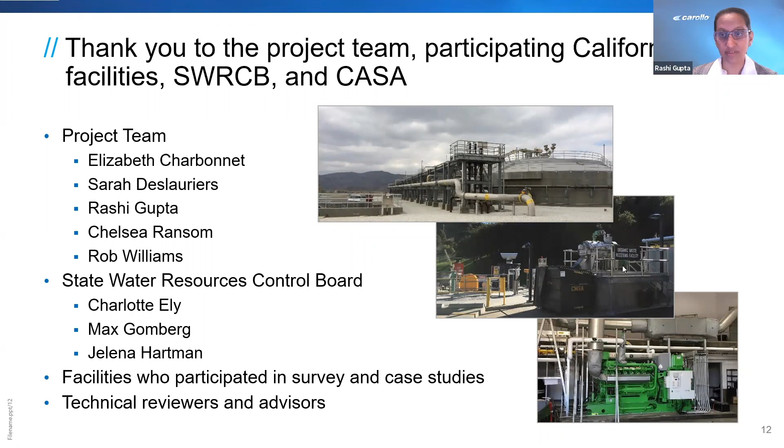Senate Bill 1383 was really the driver for this work. It focuses on several things, including an organic waste diversion component. The bill was adopted in 2016, with a goal of 50% organics diversion from landfills by January 1st of 2020. The regulations have been finalized, or are in the process of being finalized, and are expected to be adopted either the third or fourth quarter of this year.

Then in 2022 is when state enforcement on jurisdictions begins, followed two years later by jurisdictions beginning their own enforcement. In 2025, the target is to have a 75% organics diversion from landfills, with the ultimate goal being the bold item there in 2030 of a 40% reduction of methane.

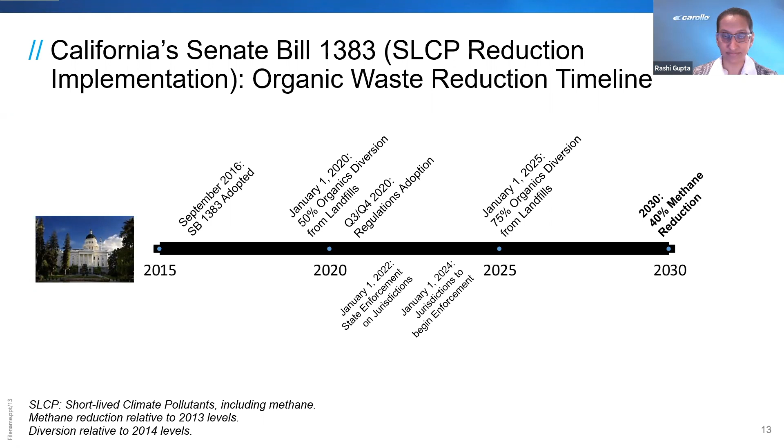California seeks to reduce methane emissions, and co-digestion at treatment plants could play a major role. Methane is a very powerful greenhouse gas, and a lot of methane is released from food waste in landfills. So reducing that food waste will reduce methane, and diverting the food waste to anaerobic digestion produces renewable energy and soil nutrients.

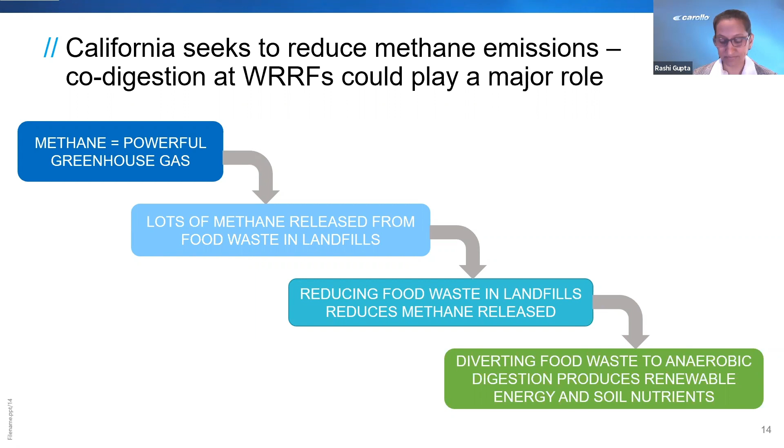So what is co-digestion? Very big picture again: co-digestion includes a municipal sludge component that is typically fed into our anaerobic digesters, and an external organic waste component, which can be food, food processing waste, FOG, or organics from municipal solid waste. The bold item is really what today's talk is about.

We're focusing on the organics from municipal solid waste component, shown here in bold. That organic feedstock needs to be cleaned in some fashion, whatever it happens to be, so some level of pre-processing. Then the sludge and this organic waste are fed into the anaerobic digester.

From the digestion process, a biogas component is generated that we can treat and use beneficially for vehicle fuel, pipeline gas as biomethane, or through cogeneration with heat and power. The solids are then further processed through dewatering and used beneficially off-site. There's also a component on the side stream that requires treatment within the treatment plant, but we're not going to be focusing on that today.

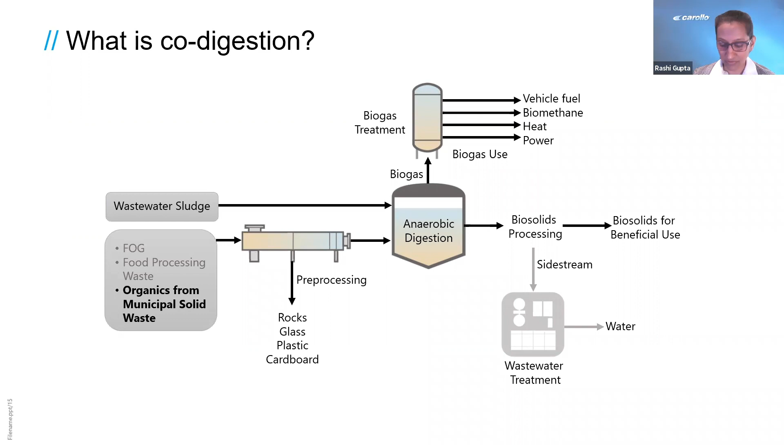There's been a lot of talk in the last few years about excess digester capacity for co-digestion and producing renewable energy at treatment plants. The state asked whether we can use this excess capacity to help meet its methane reduction goals.

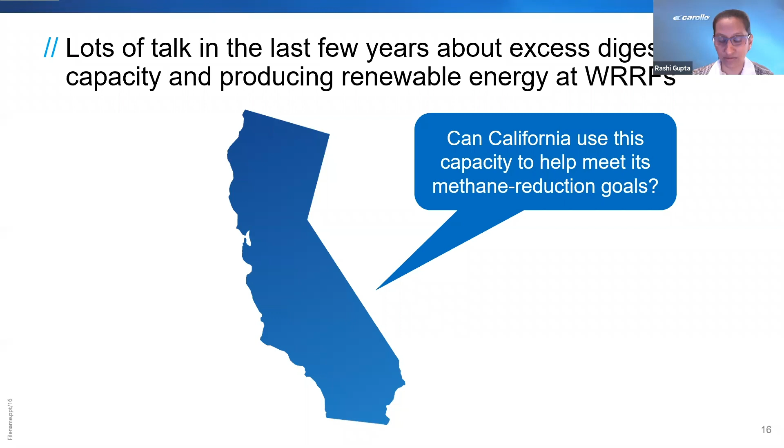The state agencies had many of the same questions about co-digestion as you probably do: How much capacity do we actually have? How much additional capacity do we need? How much is it going to cost to implement? And how much of an impact is this actually going to make towards our goals?

Based on those questions, the State Water Board worked with us to develop this report, which was the final product, finalized in August of 2020. The report is titled Co-Digestion Capacity in California. It's a 6-chapter report with a lot of detailed appendices.

For any of you on the line interested in those details, I would highly recommend taking a look at the appendices. They include a lot of the information that formed the basis of the report, with all the assumptions and details. The report was actually finalized in June of 2019, then underwent a multi-agency review at the state level, which ended at the governor's office, and was finally published in August of 2020.

We're going to go through the report chapter by chapter, but first we wanted to put out a polling question and allow you guys to fill that out.

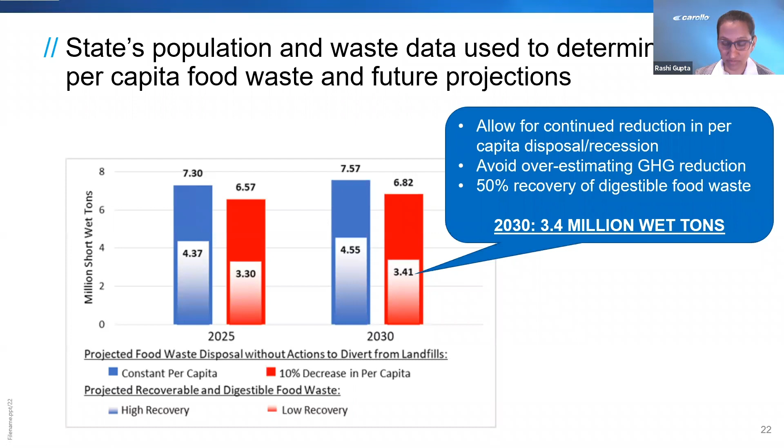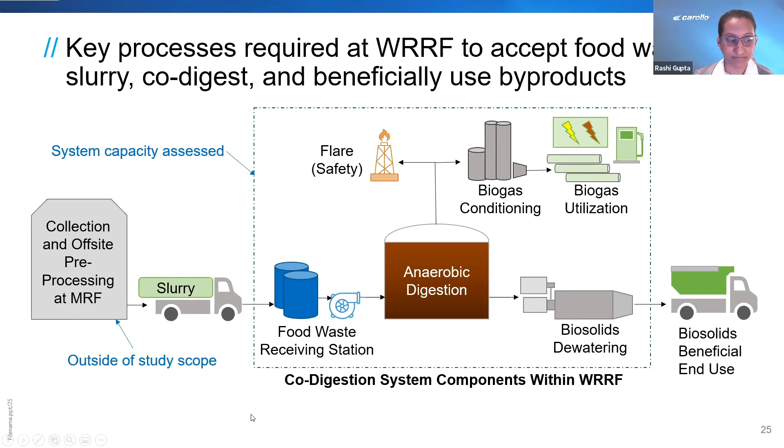So we developed a comprehensive survey that was distributed to the treatment plants within the state, focusing on solids and biogas systems, and we analyzed the results to develop our capacity analysis. The survey was sent to 223 treatment plants around the state, and we got responses from 99 of those, representing about 80% of the state's total design flow capacity. We thought it was a pretty good representation of the capacity within the state, and we also got a good variety of the size of the plants that responded.

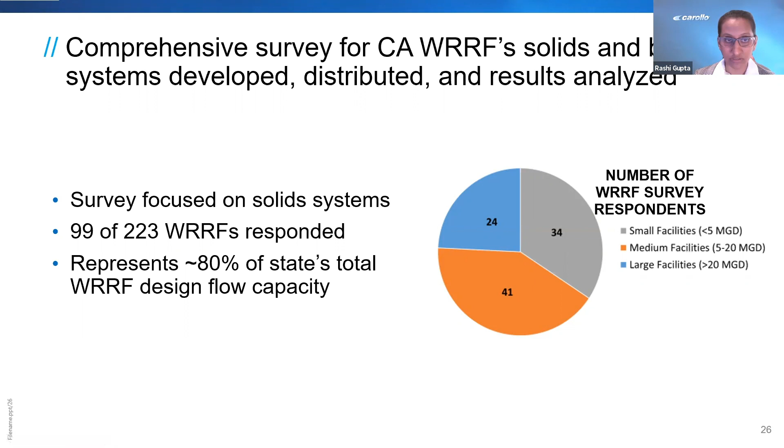So we took that information from the survey and compared current and projected loads, including any organic waste that the plant is currently receiving, and then the loads projected out in 2030 for both the municipal wastewater indigenous sludge, as well as the potential organics in the future. And we compared that to the existing capacity of the systems to identify excess capacity in those key processes that I mentioned.

One thing to note here, throughout this presentation as well as within the report, is that excess capacity is reported as short wet tons per year of diverted food waste, because we wanted to illustrate the statewide impacts of organics diversion. That is the diversion from the landfill, so that is what the terminology is. What that means is the food waste is diverted to a material recovery facility at about 30% total solids.

But a treatment plant needs a material that is pumpable to be able to be sent into the digestion process, so we are assuming that the slurry produced and delivered to the treatment plant is at about 15% total solids. Just keep that in mind, that any of the values you're seeing on the charts are in this form - the short wet tons per year of diverted food waste at that 30% total solids value.

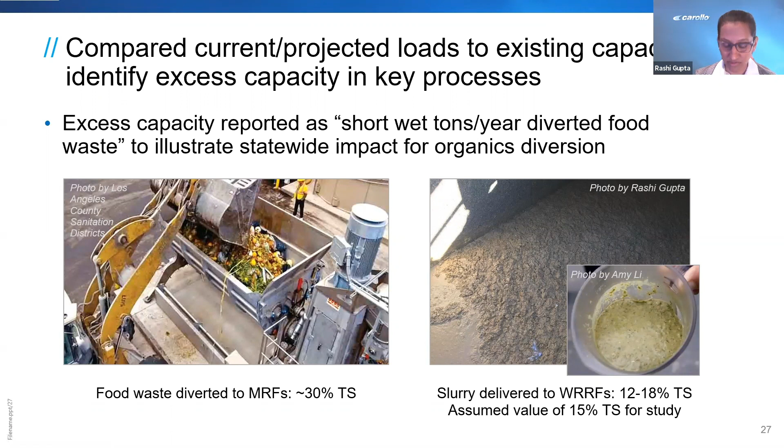So we looked at all of the key processes, and specific to digestion, we looked at various operating scenarios. We looked at SRT - a 15-day SRT as a minimum, and then we considered a design SRT for treatment plants, which is usually higher than that 15-day minimum. We looked at redundancy, whether we had all of our digesters in service or if we had one of the largest digesters out of service.

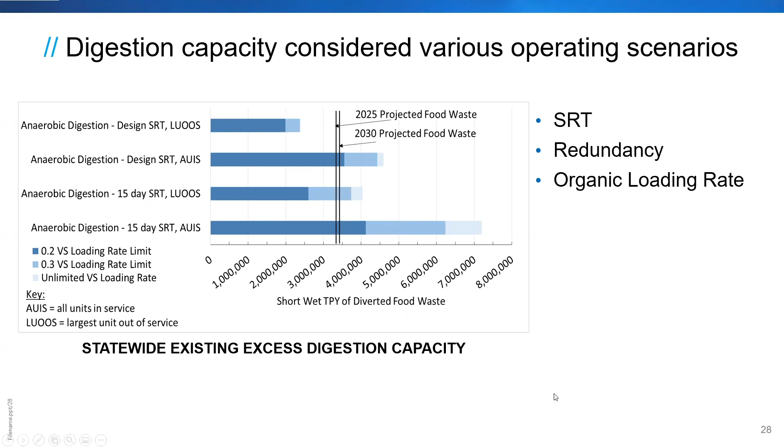And we considered different organic loading rates. The organic loading rates that we considered are higher than what we typically look at for just indigenous sludge monodigestion, which can be difficult to digest. The food waste is more easily digestible, and several plants have been able to accommodate higher volatile solids loading rates. So we looked at the 0.2 VSLR - that's 0.2 volatile solids per cubic foot per day as the loading rate. We looked at that, and we know that's achievable and maintainable at treatment plants.

Some have indicated you can achieve even higher loading rates than that, so we did consider the 0.3, and then we said, okay, if there's no volatile solids loading rate limit, what kind of capacity would we have? So we looked at all of those scenarios to determine where we stood relative to the projected food waste for the capacity. And again, this is excess capacity under digestion statewide.

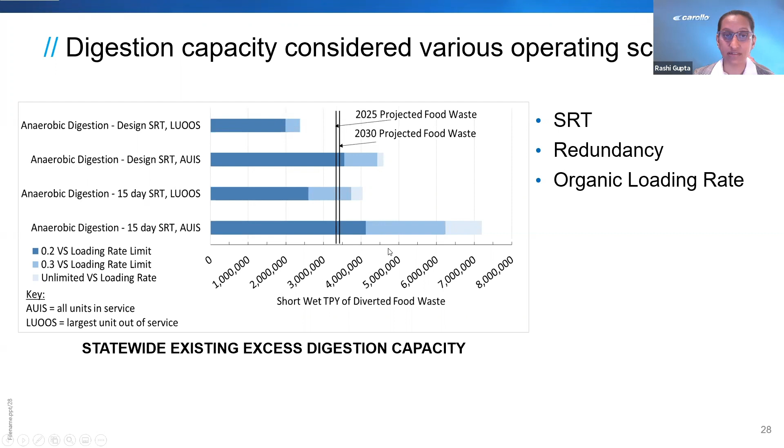The capacity for the specific processes at large facilities, we then extrapolated to cover those plants that did not respond to our survey, so the extrapolation only occurred for large facilities. There were 9 treatment plants that we know had digestion across the state that did not respond to the survey. We extrapolated only for those large facilities, and we only extrapolated the processes that would scale with the influent flow - the digestion, the dewatering, and the flare capacity. We did not extrapolate capacity on anything else.

We found that we have sufficient digestion capacity for most of the projected food waste of that 2030 condition - about 70% in our more conservative digestion operation scenario, and more than 100% capacity for the more aggressive scenario on digestion capacity. The other thing to point out here, and this is one of the major portions of the report, is that the capacity limitations are really in the receiving station, the biogas conditioning, and biogas utilization elements. Those are the key processes where we did not have sufficient capacity, and that illustrates where we might be able to target investments to maximize the capacity of the digestion, which we have sufficient capacity for.

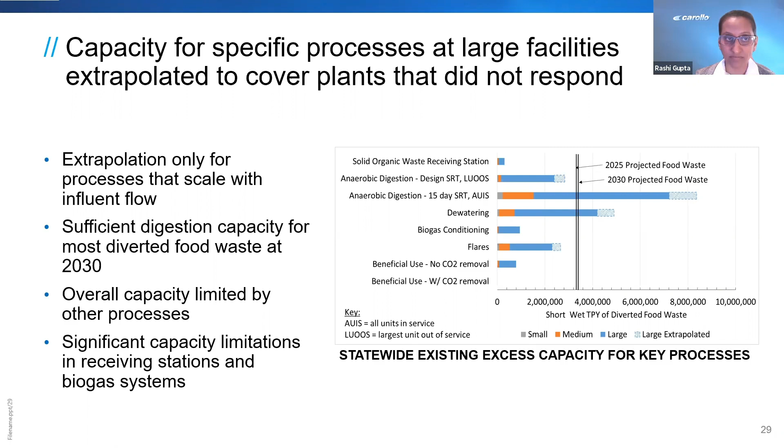We also looked at and found that we have 7 treatment plants around the state that currently have all of the system components we mentioned. We looked at the location for those facilities, and you can see that they're located in those areas of the state where we're generating the most food waste, and that they're the most populous.

So there's some synergy there about the location of the treatment plants and the source of the food waste. We also found that there are limiting processes. There's capacity limitations within these 7 treatment plants where the capacity is not limited by digestion, but by one of those other key processes. Because of that, we're limited right now, in terms of capacity in the ground, to about 118,000 wet tons diverted food waste per year, which is only about 3.4% of that 2030 projection.

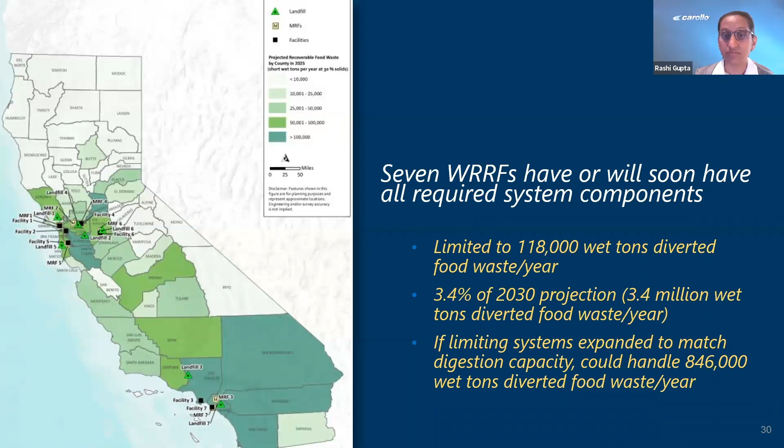However, if just those 7 treatment plants were to expand those limiting systems to match their digestion capacity, they could handle 846,000 tons per year. That's about a quarter of that 2030 projection, just in those 7 facilities. So that helped us understand that there are significant benefits to targeting investments in these ancillary processes, not the digestion, but the key processes that we need for this to work out. And that leads us to chapter 3 that Elizabeth is going to summarize for us.

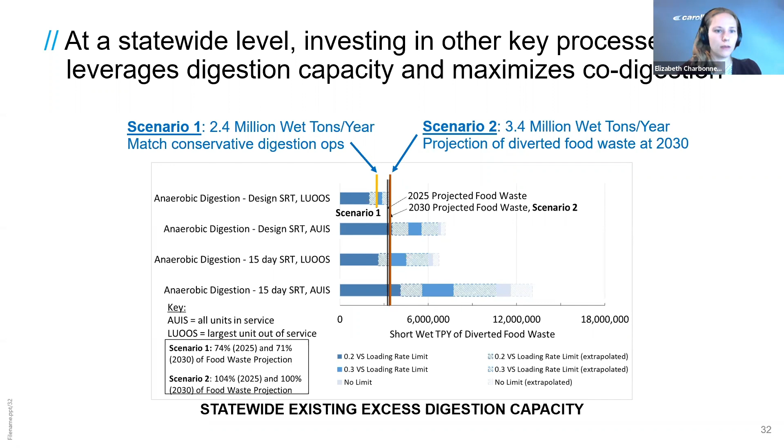For each of these scenarios, we then developed planning level capital costs as well as O&M costs for these 2 scenarios, and then also for an illustrative facility to provide agencies a guidepost to more readily understand the potential costs for their particular facility.

Starting with capital costs, we just looked at the capital costs needed to increase the capacity in the key processes other than digestion. We generally used a unit cost approach for the majority of these unit processes - for biogas conditioning and end use, as well as dewatering investments. But then there were a couple of key processes that didn't really scale with flow or load, so instead we used discrete costs for different sized facilities. For example, for the receiving stations, and then one discrete cost for the interconnection to a pipeline, which is not dependent on facility size.

From an O&M perspective, we also looked at these costs, and specifically, we just looked at the incremental increase beyond the indigenous solids treatment. So we were just looking at the cost of treating this additional food waste that would be added to each of the treatment plants in California. We looked at labor costs, maintenance, energy, as well as additional dewatering polymer and biosolids hauling and end use costs from that food waste addition.

For more details about all of these cost factors, the assumptions that went into them, take a look at Appendix 3A of the report that has a pretty good summary and also compares the costs that we were using to some other reports and other numbers, just to get a sense of where our numbers are falling.

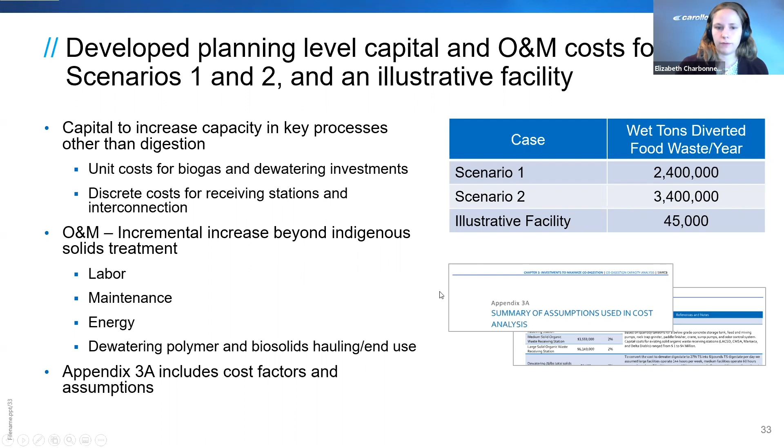We also looked at revenue estimates, not just costs for co-digestion at wastewater treatment plants. These revenue estimates included revenue from tipping fees from accepting that food waste, and also from biogas utilization. Specifically for biogas utilization, we looked at 3 different end uses for biogas: first, turning biogas into electricity through cogeneration; second, turning biogas into RNG for vehicle fuel use; and then third, turning biogas into RNG for pipeline injection. We assumed an equal split among these 3 different end uses for biogas across the state.

We not just accounted for revenue of those commodities themselves, but we also looked at the potential revenues from different energy credits - specifically D5 RIN credits, low carbon fuel standard credits, as well as SGIP renewable energy credits, with the big caveat that there's a lot of inherent uncertainties in all of these revenues, so as the values change, that can really impact the economics. For example, the low carbon fuel standard credit, shown in the graph on the right, you can see how it's varied over time. For the report, we had assumed $169 per metric ton of CO2 equivalent, which based on the past couple of years of data seems to be still a reasonable number to be using.

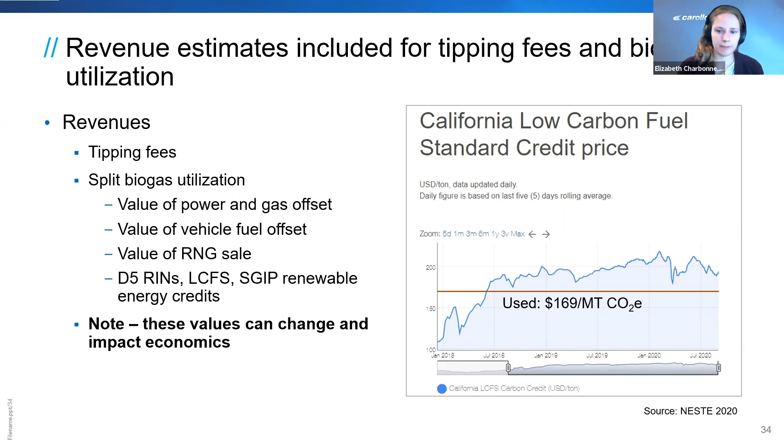This table shows the results of the cost and revenue developed for each of the scenarios considered. A couple things to point out: on the far right, the biogas use for the 3 different cases. For the 2 statewide scenarios, scenario 1 and 2, we were assuming an equal split of biogas for electricity, vehicle fueling, and pipeline injection. For the illustrative facility, we just picked one, and we assumed it would be CNG vehicle fuel use.

I also wanted to note that the estimated O&M costs per year are much less than the estimated revenue per year in all 3 of these scenarios. Additionally, over the 15-year project life, if you do a simple payback period, they cover the estimated capital costs. So these projects can be economically favorable.

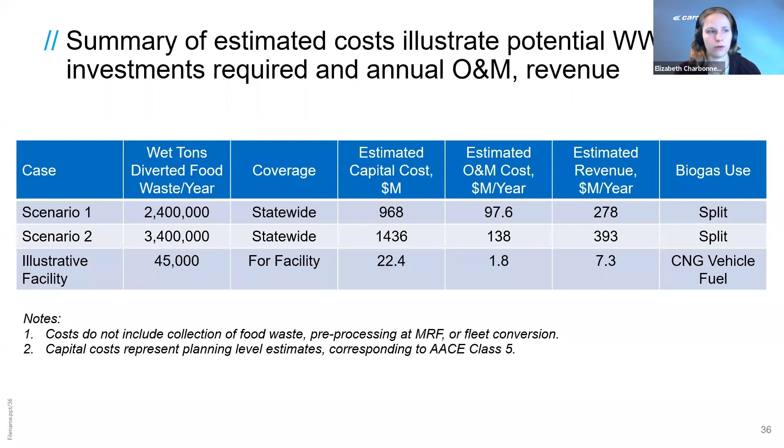Additionally, we conducted a number of sensitivity analyses for various biogas utilization options, as well as impacts on facility size and CNG and power prices. The renewable energy incentives currently favor CNG and RNG uses for biogas, but positive economic outcomes are more likely for higher capacity facilities.

However, this analysis looks at the state as a whole, but the story for each individual treatment plant may be different. For example, for a facility that may not have a vehicle fleet but has an underutilized cogen engine, electricity generation may be more favorable for that facility. So you do have to look at this on a facility by facility basis.

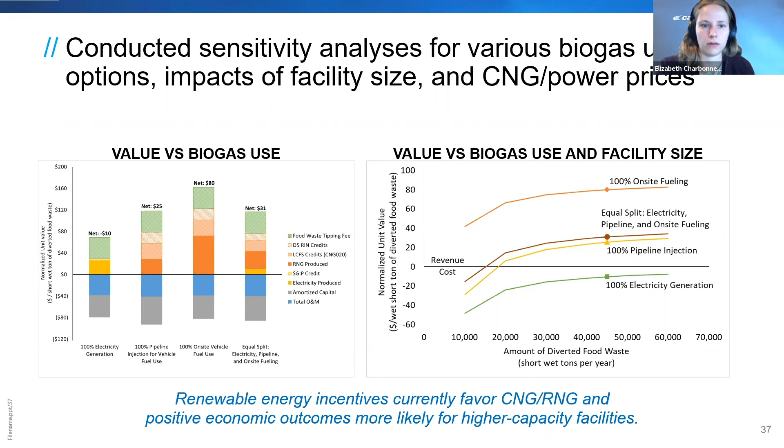We also looked at non-economic impacts for this report. First, we considered community impacts near water resource recovery facilities, starting with job creation. Based on the 7 facilities currently co-digesting food waste, we found that job creation at these wastewater treatment plants may be limited. However, there may be additional jobs possible for offsite needs at materials recovery facilities, for example.

Additionally, we looked at quantifying truck trips and noise near wastewater treatment plants and found that would increase, but analogously, truck trips and noise near landfills would decrease because food waste is no longer being sent to those facilities and instead sent to the water resource recovery facilities. Finally, we also looked at odor control, and all of the costs we were assuming did include odor control to help minimize impacts on surrounding communities.

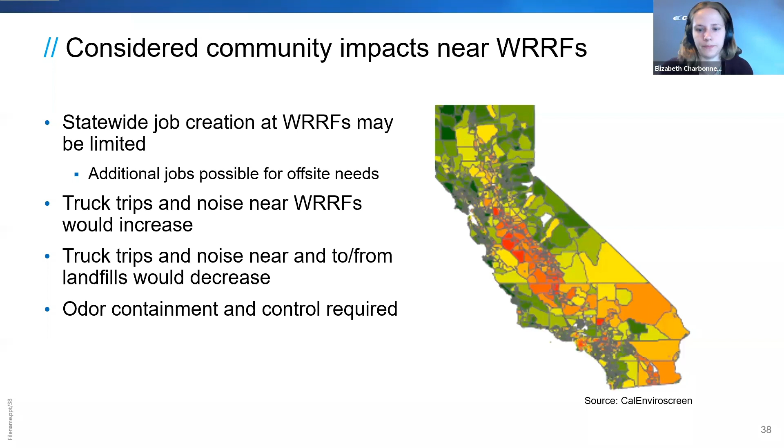In addition, we did outline regulatory considerations for water, air, and land that can affect feasibility. For water, if you are a facility that has nitrogen limits or TDS limits, the effluent could be impacted by co-digestion, and side stream treatment may be required depending on what that limit is and what your secondary treatment system looks like. From an air perspective, air boards are adding increasingly stringent limits on air quality, which may impact the economics of biogas utilization. Finally, from a land perspective, for biosolids generated, you'll need to think about how to best use those biosolids, and limits on land application can necessitate longer haul distances and increased costs for biosolids management as well. So some non-economic factors to consider.

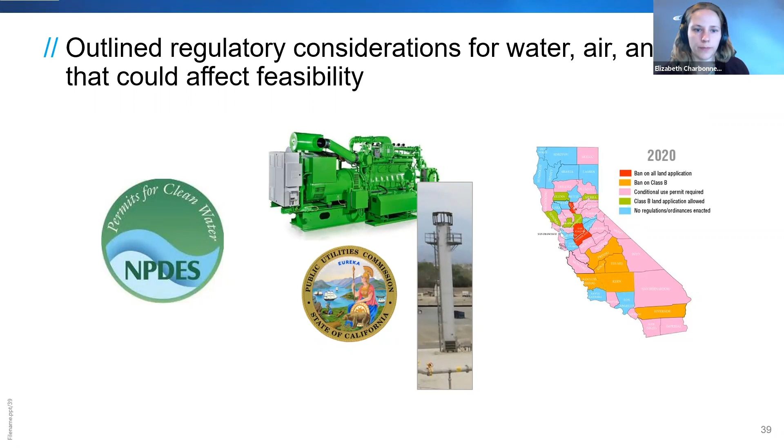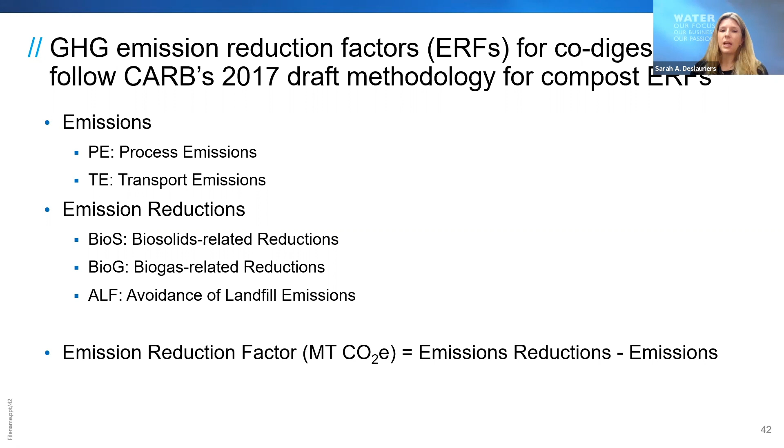So just to give you some information on how we looked at this, the greenhouse gas emission reduction factors are what we were trying to determine and develop for co-digestion. We did follow the Air Resources Board 2017 draft methodology for compost emission reduction factors. We considered all the same sources of emissions, process emissions and transport emissions, and there's also emission reductions we considered, the utilization of biosolids and biogas, as well as avoidance of landfill emissions. The emission reduction factors are determined by taking those emissions reductions and subtracting the emissions to get your net factor, in metric tons of carbon dioxide equivalents per wet ton of food waste.

I just wanted to note that for this term in particular, it turned out that the process emissions themselves, when we calculated it, fell within and were functionally equivalent to those for landfilling. So that term in essence becomes zero because it's not differentiating from landfill.

Transport emissions, similarly, we looked at transport distances and the emissions associated with those distances to transport the material to the MRF and then to the wastewater treatment facility. Those emissions were similar to composting, which were also functionally equivalent to landfilling transport emissions, so that term went to zero as well. We detail all this information in the report, so if you have any questions or want to dig deeper, it's in there. But just for your information, we wanted to cover that. So emissions came out that way.

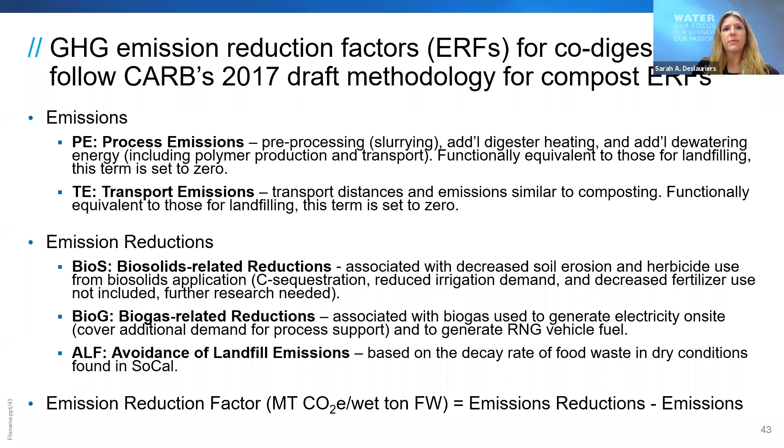And just wanted to give you a summary of the actual numbers that resulted from that methodology. As I mentioned, those two emission sources were functionally equivalent to landfills, so they went to zero. So we're showing emission reductions for biosolids use, biogas use, and avoided landfill emissions. That range for biogas use, 0.21 metric tons of carbon dioxide equivalent reduction per wet ton of food waste, is associated with renewable energy generation on site. 0.26 is associated with low carbon fuel production. So ultimately we result in 0.65 to 0.7 metric tons of CO2 equivalent per wet ton of food waste.

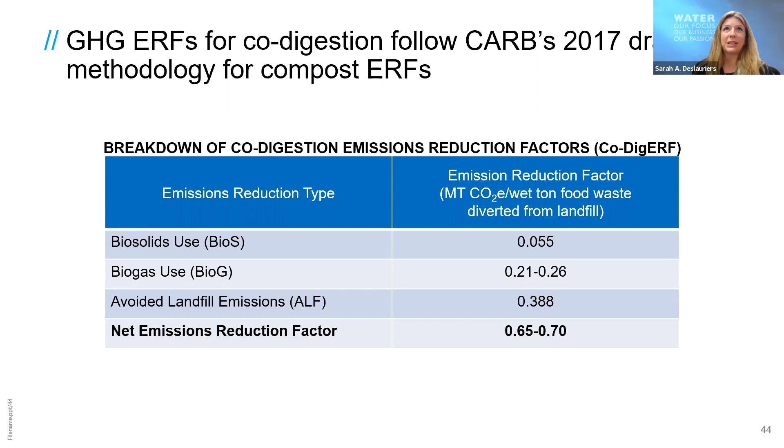But who cares about that number unless it's relevant to something. So the next slide shows those numbers: 0.65 if you're doing renewable electricity, 0.7 is the middle bar if you're doing renewable natural gas for transportation fuel. And at the end, for composting, relative to that, it has 0.55 metric tons of CO2 equivalent per diverted wet ton of food waste. So you can see there's slightly greater greenhouse gas reduction potential than composting at this point in time with the numbers we have right now, even when being conservative.

But again, as a reminder, we have additional research already underway looking at carbon sequestration from biosolids land application, as well as other benefits that can help enhance these reduction factors, as well as the composting reduction factor. So we'll see that over time.

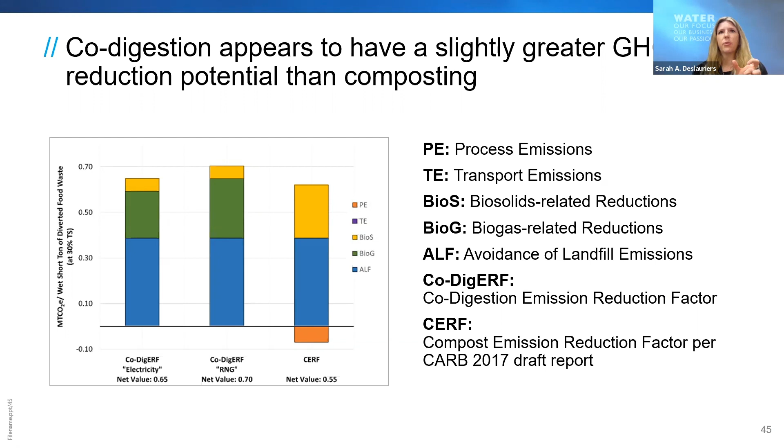All that said, these are kind of unit factors. So what does that mean in terms of the big picture and the total amount of greenhouse gas emissions we can see reduced per year, so we can understand what this looks like relative to the goal we're trying to accomplish, which is 4 million metric tons of CO2 equivalent reduction per year by 2030 from landfills. As Elizabeth and Rashi mentioned, scenario 1 is more conservative.

We looked at that with keeping design SRTs, as well as the largest unit out of service, and a 0.2 volatile solids loading rate. So being conservative, what tons can be diverted, that's 2.4 million wet tons per year, and what does that result in terms of net emissions reduction potential? That range, 1.5 million to 1.7 million, is what can be accomplished with scenario 1.

And then scenario 2 is more of a combination of operations that can manage or maximize co-digestion at existing facilities. If we make those investments, we can divert 3.4 million wet tons of food waste per year, and that can get us up to 2.4 million metric tons of CO2 equivalent reduction, which is about 60% of the state's goal to reduce landfill emissions.

So it's very significant, very important to be thinking about and considering — if we're all going to be working together as a waste sector and wastewater, water resource recovery facility sector, we can accomplish some pretty big things by recycling this material through digestion and co-digestion. Particularly thinking right now about the wildfires, there's an added benefit we should all be thinking about in terms of using biosolids for reclaiming land, further reducing and sequestering carbon, and preventing wildfire in the future. So that's just to bring some of that into context of what's going on right now.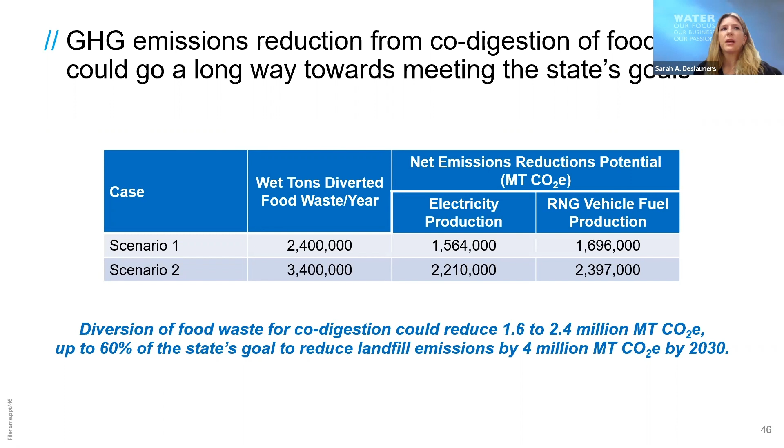But with that, I want to hand it back over to Elizabeth to start going into the small to mid-sized case studies where we can show some results. Awesome, thank you, Sarah. See if I can get control here. As Sarah mentioned, we've been talking about the statewide analysis thus far, and the last two chapters of the report focus on some case studies we looked at. Chapter 5 specifically looks at co-digestion at small and mid-sized water resource recovery facilities.

So we specifically looked at 4 different wastewater treatment plants that are currently or plan to co-digest food waste in the near future. The first of those facilities is Central Marin Sanitation Agency, also Manteca Wastewater Quality Control Facility, as well as Delta Diablo and Silicon Valley Clean Water.

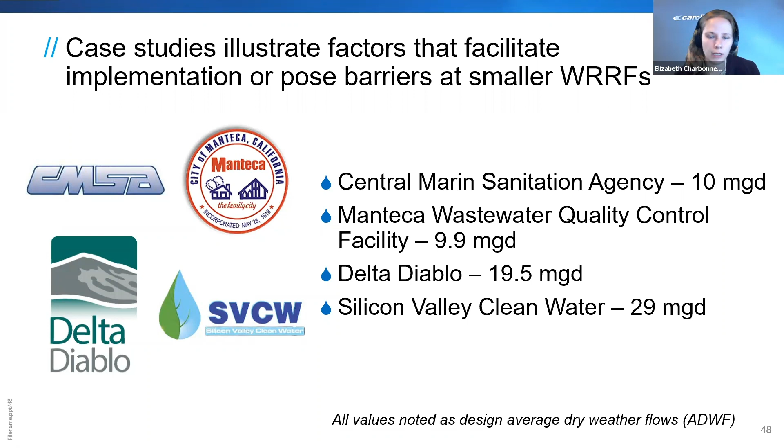Through each of these case studies, they really illustrate factors that facilitate implementation of co-digestion or pose barriers at these smaller treatment plants. But before I get into the details of those case studies, we had another poll question for you. Alec, I'm gonna let you bring that poll question up.

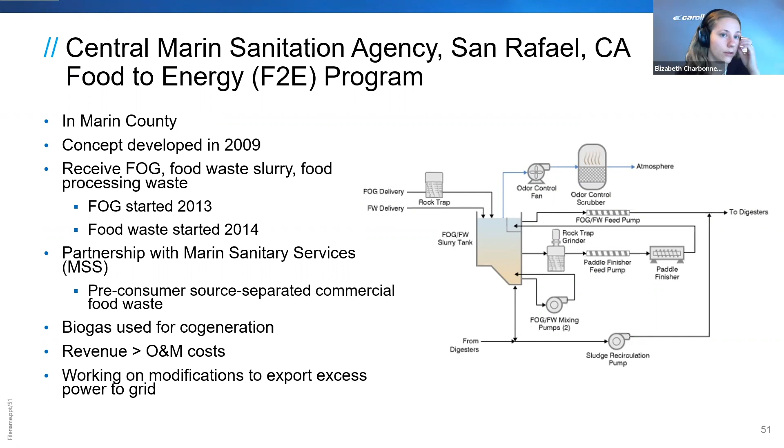The first step in this process is that Marin Sanitary Services collects, sorts, and processes the food waste into a slurry at their close by facility and trucks it to the plant. This is really where they're trying to address some of the quality concerns of that food waste that folks were mentioning in the poll answer, to try and get the highest quality feedstock that they can to CMSA.

CMSA takes about 6 to 8 wet tons per day of slurry, about 6 days per week, and it's dumped into a below grade pit. That's mixed with the thinner FOG that's also received about 5 days per week, so that it's mixed into a pumpable slurry. They still send it through a paddle finisher to polish it to get out some of those final contaminants. That blend at about 7% solids is then fed to the digester to produce biogas.

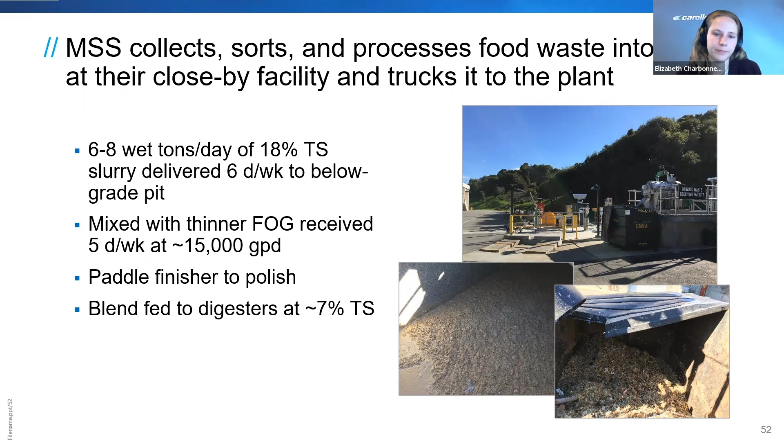All right, so now I'm going to talk through some of the factors facilitating co-digestion at CMSA. Really the initial driver for this project were the California regulations to reduce greenhouse gas emissions, as well as a grant that was received by PG&E to do an initial co-digestion study with Marin Sanitary Services and the city of San Rafael. Through the results of that study, they took those results to their board and also to the city council. The board and council were very interested in exploring co-digestion further, so really getting the board on board is helpful for moving these projects forward.

From there, they then solidified agreements with Marin Sanitary Services to accept food waste, as well as with Marin Clean Energy for purchasing the electricity that would be produced. Finally, Marin Sanitary Services also did a lot of community outreach for the project to ensure that they were getting a quality feedstock and folks knew what could go in the food waste bin and what couldn't to minimize contamination. CMSA also ran the numbers to make sure that the project was going to be economically favorable.

In addition to that, there were also a number of factors that were impeding co-digestion at CMSA. Ultimately, they were able to overcome all of these, but I did want to walk through some of the concerns that they found. The first of which being power forecasting.

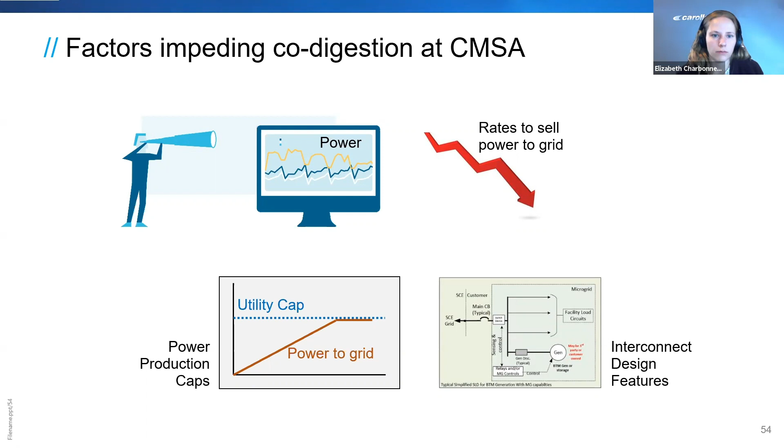Also wanted to share a few lessons that CMSA learned and some advice they had for successful operations, specifically at their plant. First, having to do with O&M: it's very important for them to get high quality feedstock, as many of you mentioned on the poll. But even with that high quality feedstock, they still need a paddle finisher for polishing.

They've also found that maintenance has cost more than originally expected. Again, still revenue positive for them, but something that should be thought about if you're considering a project like this at your facility.

CMSA also conducted a risk analysis to figure out which critical spare parts they needed to keep on hand, or on the shelf at their suppliers, to make sure the fog and food waste receiving station stayed up and running as much as possible to minimize downtime. They also had some issues with coatings, so they wanted to note that coatings can fail, something to think about during the design of a similar facility.

CMSA also had some process impacts worth noting. First, they try to avoid biogas flaring and digester upsets by managing digester feed and storing gas. They also found they need to increase the amount of polymer used to maintain the same cake dryness after adding fog and food waste.

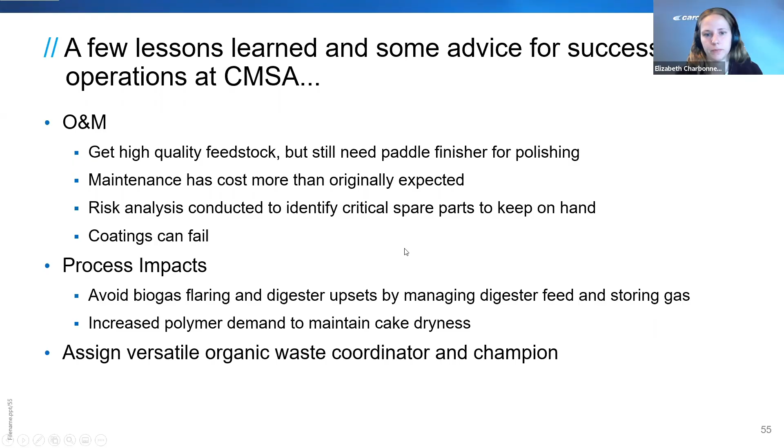So the next case study I wanted to talk through is Delta Diablo. Delta Diablo is located in Contra Costa County, and at the time the report was finalized, they were in the planning phase of the project.

The plant currently receives about 10,000 gallons per day of fog for co-digestion, and they're looking to add food waste to that mix through a public-private partnership with Mount Diablo Resource Recovery Facility. Delta Diablo and MDRR joined together and created the East County Bioenergy Project, which was planned at the time of the report to take 285 wet tons per day of food waste at 12% solids, about 5 days per week.

Right now, Delta Diablo has cogen producing about 0.8 megawatts, and with the project, they could see that increasing to 2.5 megawatts if they wanted to expand their cogen.

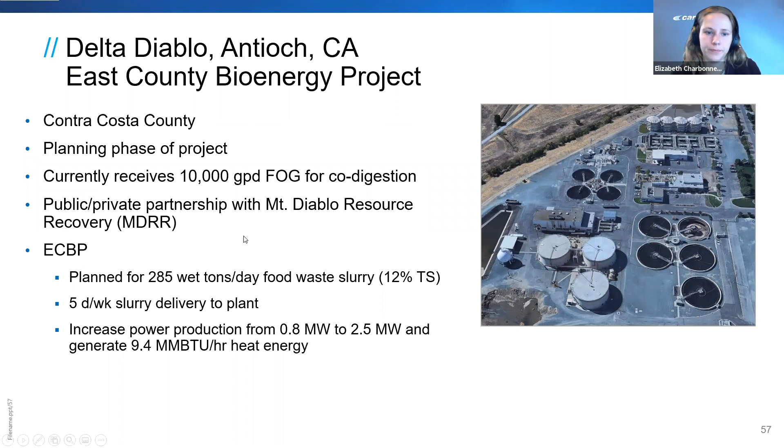This East County Bioenergy Project includes a comprehensive plan for modifications at both the Mount Diablo Resource Recovery Facility and at Delta Diablo Wastewater Treatment Plant. At Mount Diablo Resource Recovery Facility, that's where they do all of the pre-processing and polishing to produce an organic slurry from municipal solid waste.

That organic slurry is then trucked to Delta Diablo, which is located nearby, and Delta Diablo then co-digests it. There are a number of project elements at the wastewater treatment plant site to make sure the plant is able to process all of that food waste. Delta Diablo also hired an owner's advisor and specialty legal assistance to help with project development.

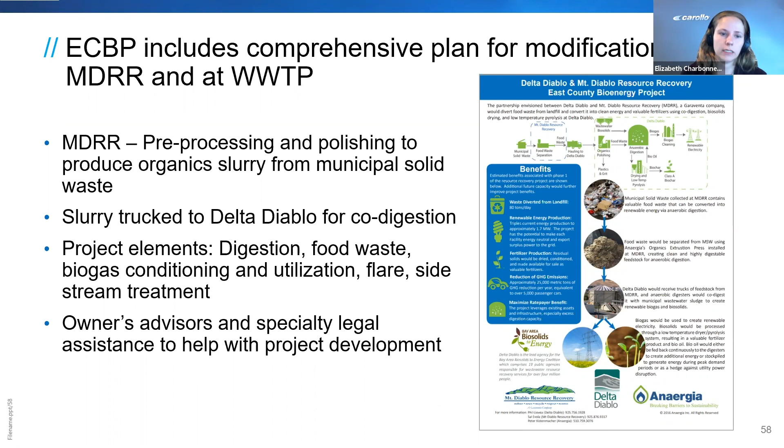Now getting into some factors facilitating co-digestion at Delta Diablo: the project was originally started by Mount Diablo Resource Recovery Facility because of organic diversion regulatory drivers, AB 1826 and SB 1383. They found that Delta Diablo shared a lot of the same goals as MDRR.

Delta Diablo specifically was interested in increasing their renewable energy and utilizing excess capacity at their plant. Because of that, the two facilities partnered together to create the East County Bioenergy Project, with a memorandum of agreement that included a 50-50 cost share for all the planning studies they then conducted.

Once they formed that partnership, they did a lot of planning and alternatives analysis to look at a number of different projects to figure out what made the most sense for the two facilities. Then Delta Diablo hired an owner's advisor to look at future revenue potential, conduct financial modeling, and assess the best biogas end use for them.

There are also some factors impeding co-digestion at Delta Diablo, the first being inadequate funding. So they're applying for several grants and loans to help make the project more economically viable.

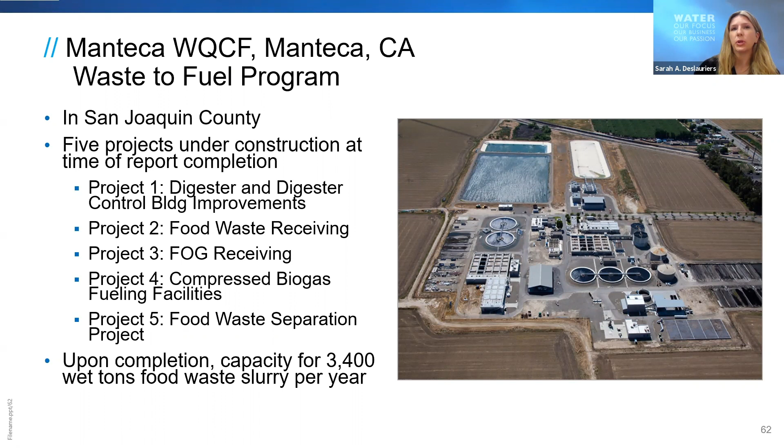They're listed in the bullets: new digesters and improvements to their digester control building as well as existing digesters, a food waste and FOG receiving facility, compressed biogas fueling facilities they were looking to implement, as well as a food waste separation project. With all of that put together, they would be able to accept 3,400 wet tons of food waste slurry per year.

Some of the facilitating factors driving them to do this project in Manteca were the regulatory drivers looking at organics diversion via the different legislation items listed, and then proximity to the CNG fueling station.

There were 4 old trucks that needed replacement, but they had a nearby fueling station and partnerships that naturally led to discussions of how they could put all of this together. Since the city was managing the wastewater treatment plant and solid waste management out there, there was a natural synergy and ability to make decisions more quickly, as well as the county owning and operating the material recovery facility. So they would come together and have these discussions about how to implement these facilities and make the project come to fruition.

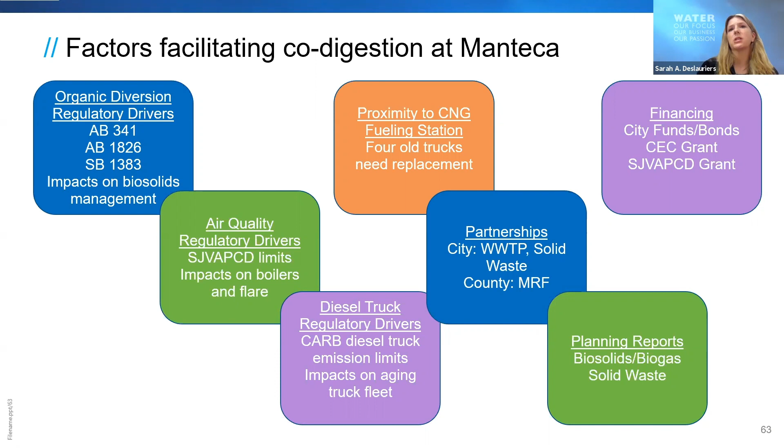But another very key and important element was financing. They did have city funds and bonds, but a CEC grant as well as an air quality management district grant through the San Joaquin Valley Air Pollution Control District really helped push these projects forward, or were helping to push them forward.

Some impeding factors for the projects though: there was still inadequate funding for equipment procurement, particularly for the food waste separator, and the revenue potential - the original plan looked at the higher value D3 RIN versus the D5, which is where the value for co-digesting biogas actually is at this point in time. So that was a bit of an issue.

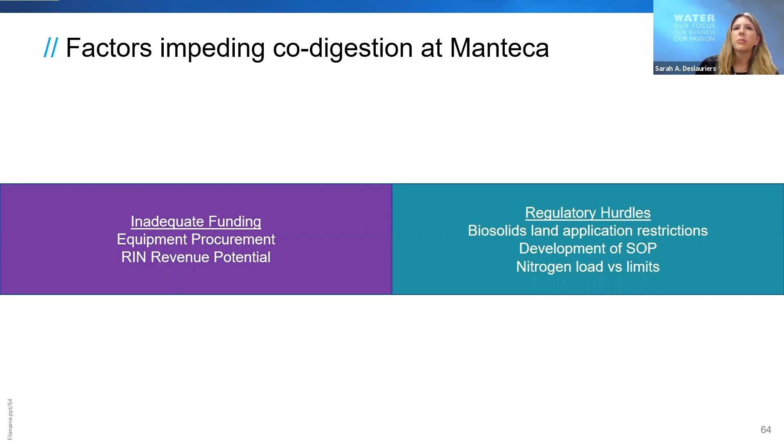Other regulatory hurdles were in their way, including land application restrictions in the area, and the consideration of increased nitrogen load from the food waste coming into their water stream, thinking about the limits on their discharge to the San Joaquin River - these were some impeding factors. So with that, I'll go into the next one, Silicon Valley Clean Water, where they're located in Redwood City in San Mateo County.

With the results they found, at the time we did this study, they were intending to proceed with full-scale implementation. There was actually a plan to have an extrusion press nearby at a partnering solid waste management facility.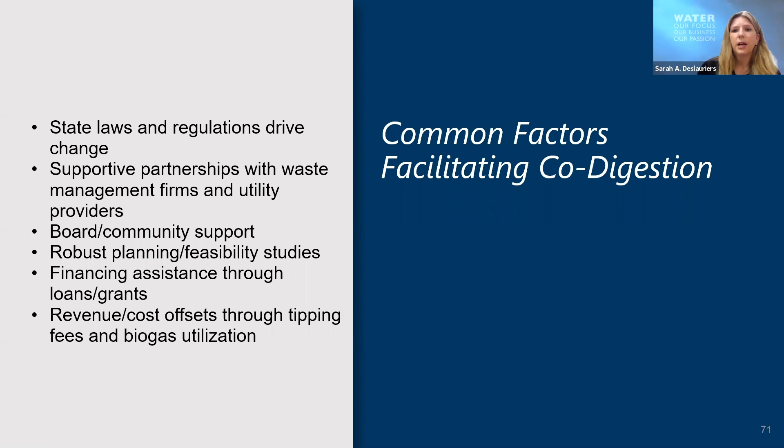Whether it was related to effluent quality from receiving a higher nutrient load, air quality, and considerations around what you do with your products in terms of land application if it's available. Insufficient planning and feasibility could lead to being an impeding factor if you didn't have enough understanding of the integration of these systems into your facilities.

Inadequate funding definitely led to some issues and barriers for folks. Feedstock contamination and competition for organics was mentioned as well in the diversion through composting and other impacts on tipping fees. So these are some common barriers that were gleaned from the case studies for small to mid-sized facilities.

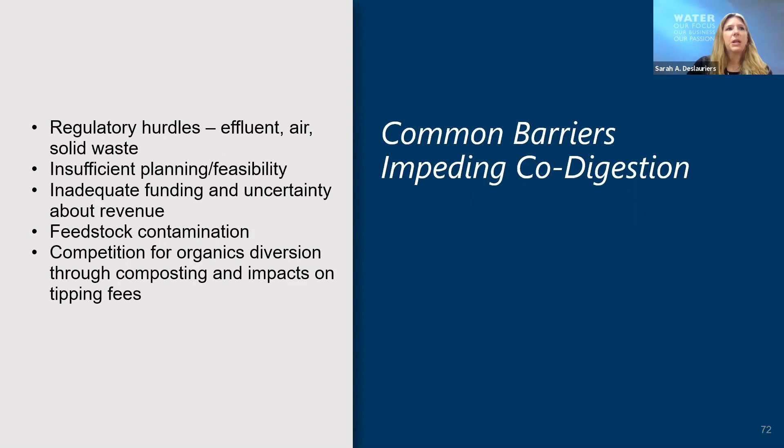I'm going to hand it over to Rashi to get into the larger facilities that have been doing this for a while and what we found from there. Okay, great. So we're almost done here. Bear with us and then we'll get to Q&A.

So we looked at not only the small and medium-sized facilities, but also larger treatment plants that have been doing co-digestion for a while. These case studies were to illustrate the specific benefits and challenges associated with co-digestion. We looked at the East Bay MUD main plant, which is a 120 MGD ADWF facility, and the joint plant operated by LA County Sanitation, which has a 400 MGD design capacity.

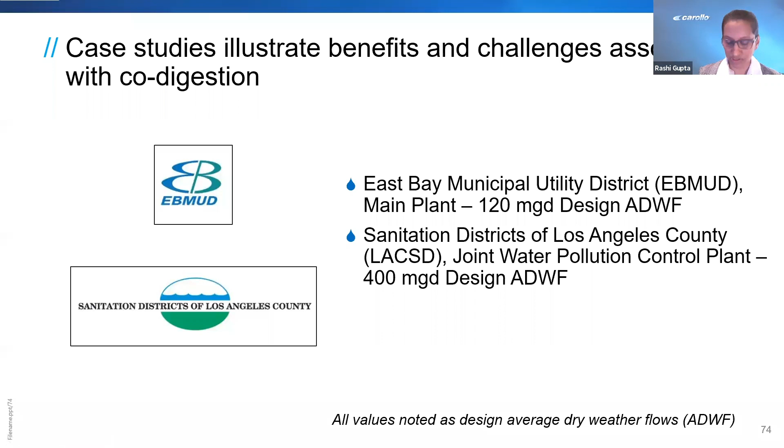First, East Bay MUD. This is a very well-known plant, and their resource recovery program, or the R2 program, leverages existing excess capacity for organics loads in the area. This plant operates 11 digesters, run thermophilically. They've got several cogeneration options with engines and a gas turbine.

They are net energy positive on average, and they are selling power back to the port, the local power consumer. Their R2 program includes a variety of organic feedstock.

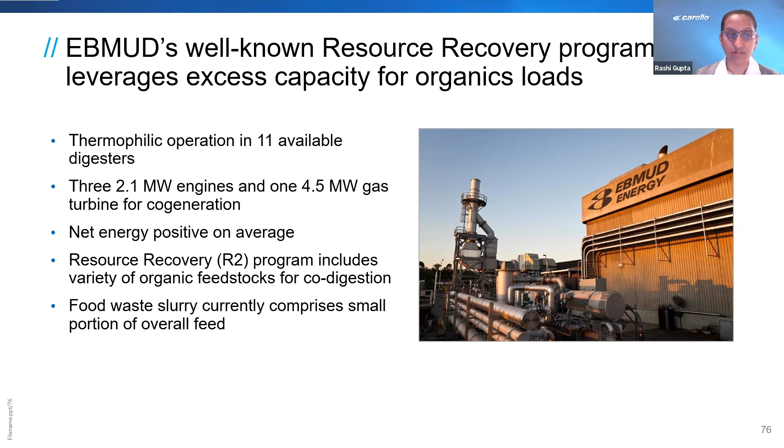So this is really important. The work that we did and what we found from this facility is not specific only to food waste slurry. It includes everything that is fed into their digesters, a lot of other things beyond the food waste slurry, and that slurry actually only comprises a small portion of their overall feed.

So they have produced, through this program, tipping fee revenue and energy that exceeds the added costs for biosolids and other operating expenses. You can see in these graphs that they have generated considerably more biogas, this is pre-R2 and this is post-R2, and they've also generated more biosolids.

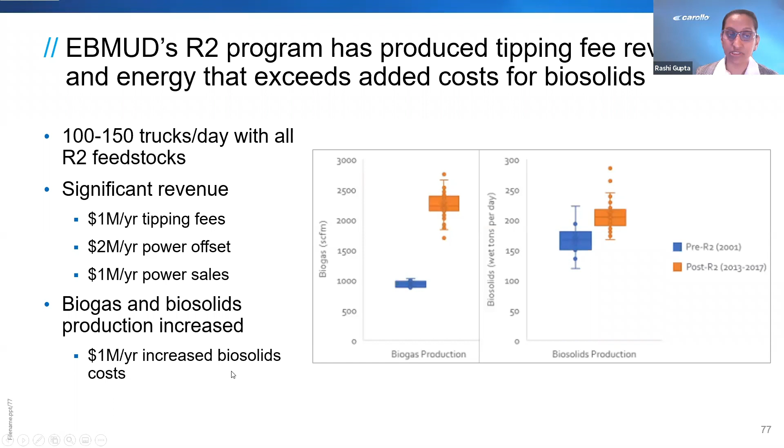But again, with the 100 to 150 trucks per day that they're getting of their feedstock, they have generated significant revenue, including $1 million a year in tipping fees, $2 million in power offsets, and another $1 million in power sales. That has offset the $1 million per year increase in biosolids costs at the facility.

They continue to address the challenges posed by the R2 program. They are concerned about the impacts on nitrogen and potential nitrogen removal requirements that will be imposed on them as well as other agencies in the Bay Area. The TDS content and the impact on the effluent is a concern too, because they use their recycled water for cooling water purposes, so the TDS or salinity can impact the use of that recycled water.

They currently have co-digestion, and the variability in the biogas production really impacts that utilization equipment. So they have worked through different ways of trying to level out the variability in that biogas production, and they are now considering incentivizing deliveries on the weekends to help even things out across all 7 days of the week. The value of their wholesale electricity is decreasing, and that's shifting the economics of their biogas utilization options.

So they were considering pipeline injection. They were impacted by some Cal OSHA regulations relative to that, but I believe recent communications with Cal OSHA have improved this, so this may be back on the table potentially for consideration.

One of the biggest things that they've had to deal with is the grit and abrasion of the material that they receive in the FOG and food waste specifically, and the increase in O&M associated with that. I believe they have conducted a test for grit removal from a 6% TS slurry that they're actually going to be presenting on at WEFTEC.

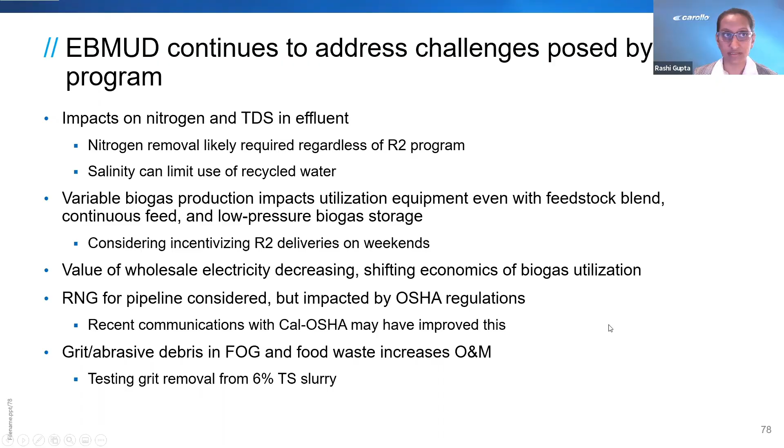So moving on to the LA County Sanitation District's joint plant. This facility conducted a long-term demonstration of specifically what we're talking about, this food waste slurry that is produced and processed offsite and brought into the plant as a slurry. They have 24 digesters available, operating mesophilically, and they have several different options for biogas utilization at the plant as well.

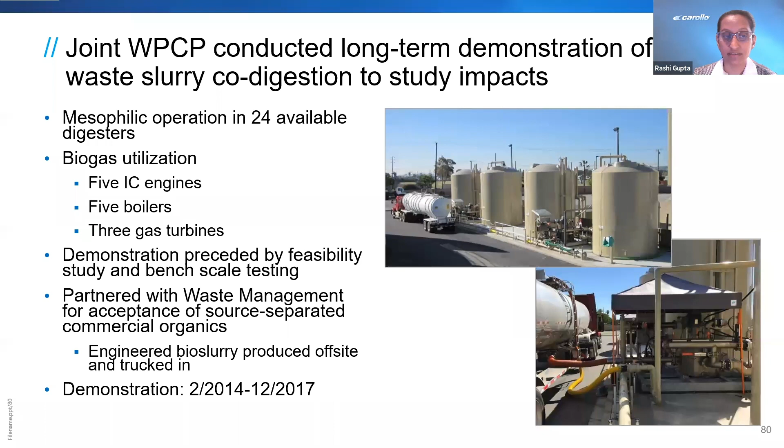The full-scale demonstration plant was preceded by numerous feasibility studies and bench scale testing conducted in the research labs of the county or the districts. They partnered with Waste Management for acceptance of the source separated commercial organics, and Waste Management produced the bioslurry that was produced offsite and trucked in. This demonstration ran for quite a while.

So they saw the increase in the biogas production, they saw the increase in biosolids production. But even with the impact on the biosolids, they felt it was worthwhile to move forward with a full-scale facility for the pre-processing.

They've also got a vehicle fueling system project that's underway, and they will construct a larger slurry receiving station at the joint plant in the future. In terms of the challenges, they were similar to what East Bay Mud found with the grit and the glass and the associated O&M. So they're also considering ways of improving the removal of those components within the slurry.

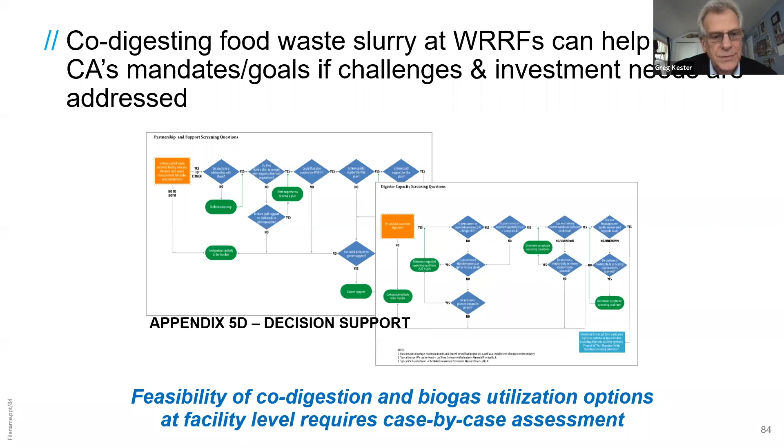First one is for the short wet tons of food waste assumption, what was it assumed in terms of the water needed to be added to dilute in order for the wastewater plant to receive it?

Right. So while Elizabeth and Sarah were talking, I did provide some responses to a few of these questions as we were going. So for that one, we did assume that the dilution was going to be occurring upstream of the treatment plant, so that it would be produced and provided to the treatment plant at that 15% total solids consistency. Thank you.

And with the lower carbon intensity values that have been derived for non-wastewater treatment plant biogas, is there a concern for saturation of the market for non-POTWs, and how might that risk be mitigated?

Right, Sarah, do you want to take that one? Yeah, I think I need to hear that again one more time, because that's a good question. Well, it was the fact that carbon intensities for dairy digesters, for instance, are far lower than wastewater plant digesters. And so does that create a concern for saturation of the market from non-POTWs? And is there a way to mitigate that risk?